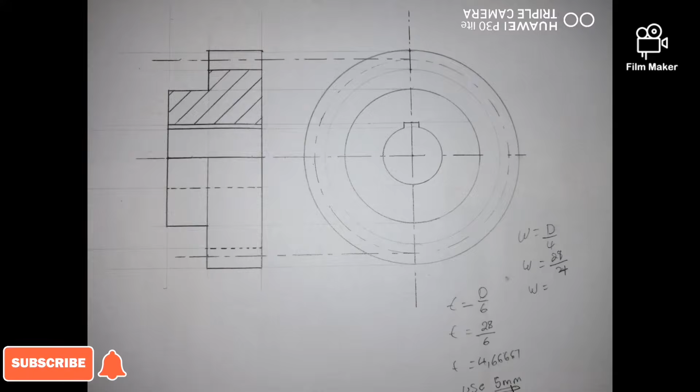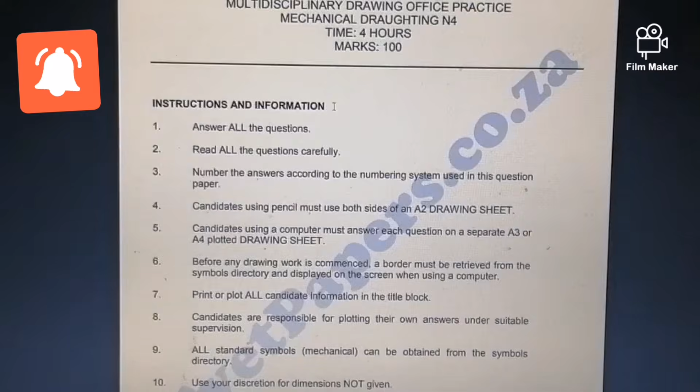Alright, ladies and gents, today I want us to look at this previous question paper that was written on the 27 March 2019 of Mechanical Draughting N4. So I want us to look at question 1. So let us look at how we can get all these 10 marks. Question 1, which was paying 10 marks.

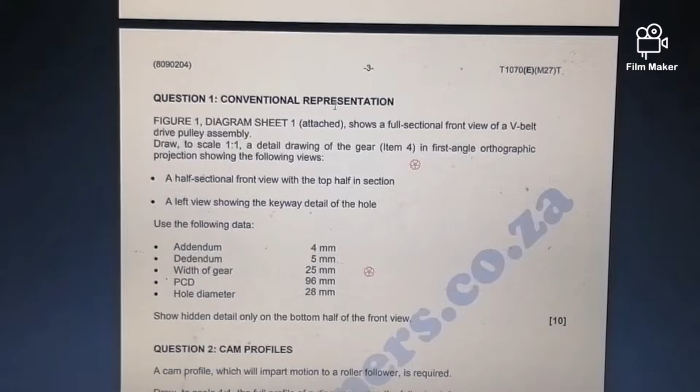So the question read as follows: Figure 1 diagram sheet 1 attached shows a full sectional front view of a V-belt drive pulley assembly. Draw to a scale 1:1 a detailed drawing of this gear, item 4, in first angle orthographic projection. You're supposed to draw a half sectional front view with the top half in section, remember, of that gear, and a left view showing the keyway detail of the hole.

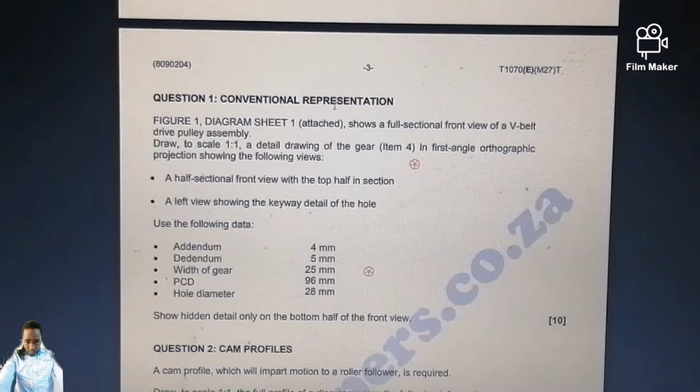So this is the following information of item 4. We are given an addendum of 4mm, dedendum 5mm. The width of the gear is 25mm, and the PCD is 96mm. The diameter of the hole is 28mm. You are expected to show the hidden details only on the bottom half of the front view, 10 marks. So if you can go down, we can start.

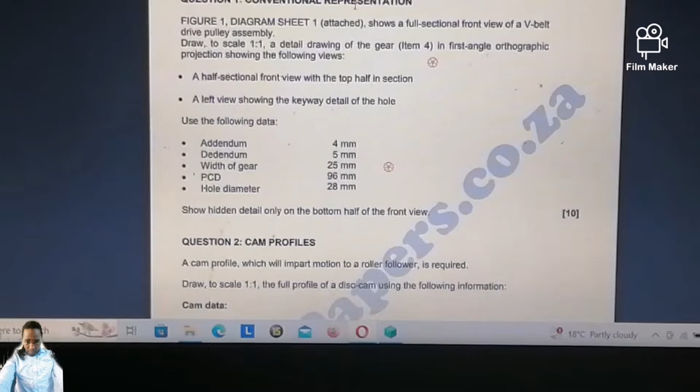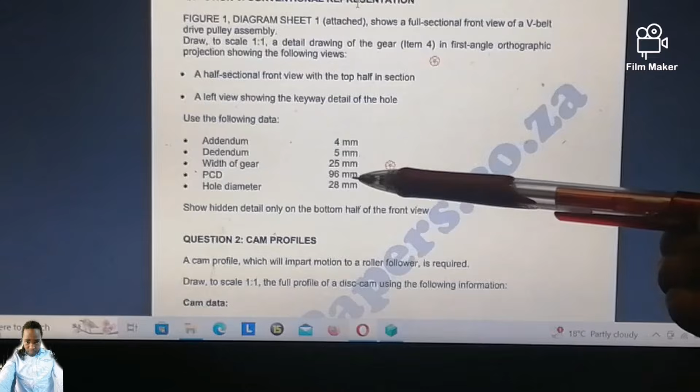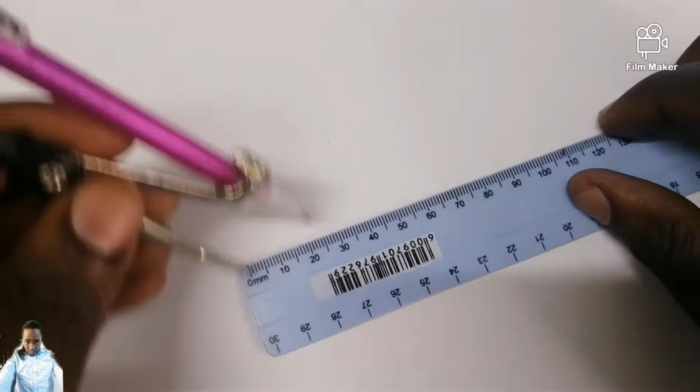So what you can do here, start with the left view, where you are going to draw this PCD. This stands for pitch circle diameter, isn't it? Using a scale 1:1, which means you're going to say 96 divided by 2, which is 48. Then open my drawing compass to 48. There's my 48mm. So now I come here, then I draw the PCD. So that's how you draw a PCD. It's a center line.

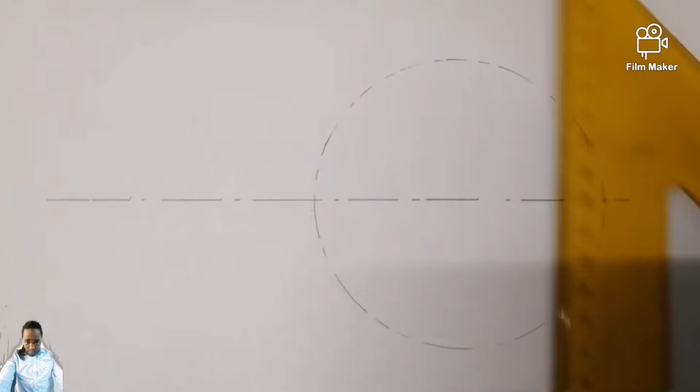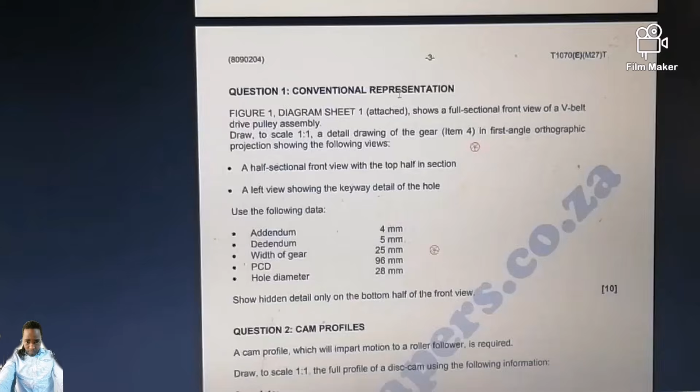So now where we're placing the drawing compass, I'm going to have the horizontal center line as well as the vertical center line. Right, so from there we are told that the addendum is 4mm and the dedendum is 5mm. We know the addendum is the dimension from the PCD going up. So these are the dimensions that we are going to follow.

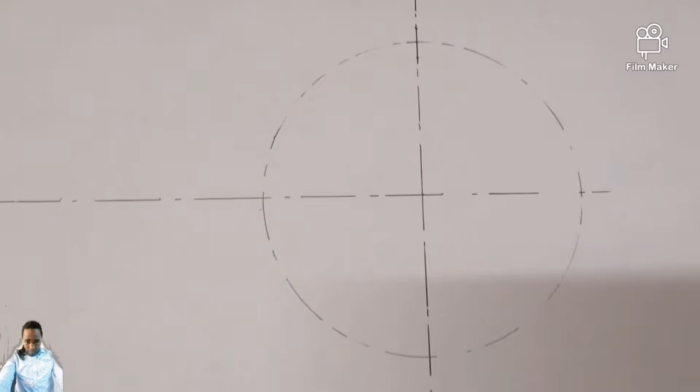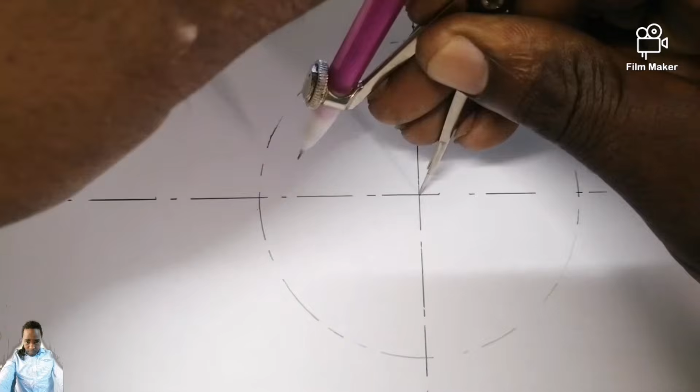So now I'm going to measure 4mm from here going out. So from here till here is the addendum, 4mm. From here till here 5mm, which is the dedendum. Then I can place my drawing compass here, extended to the dedendum. Then I draw a faint line like this. Then I can draw this one dark. This is it.

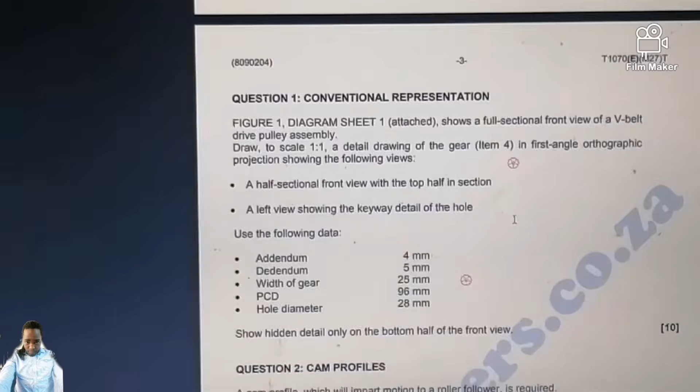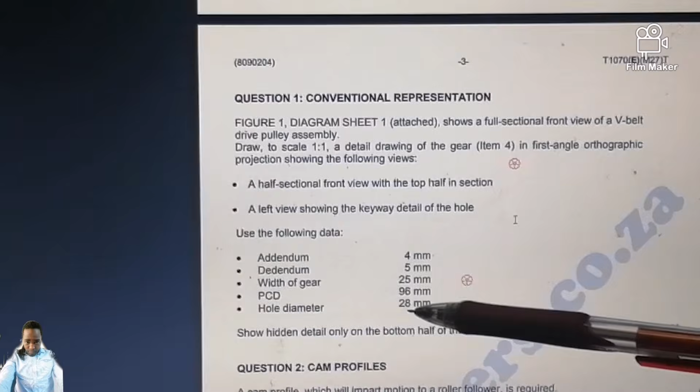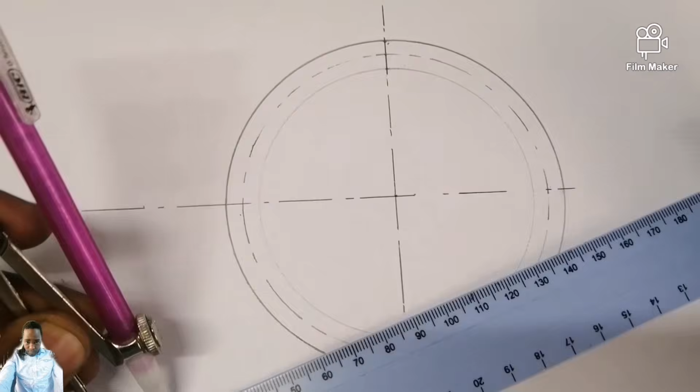So from there we can follow it by the hole diameter, which is 28 millimeter. We are going to say 28 divided by 2, 14. So you open your drawing compass to 14 millimeter. Now I come place it here. I'll draw it faint for now, because there is a keyway here that we have to get.

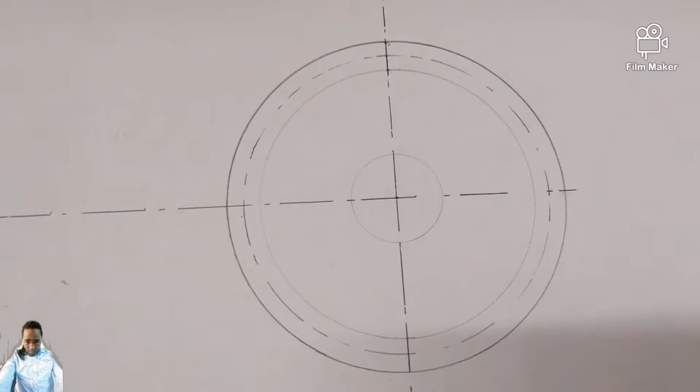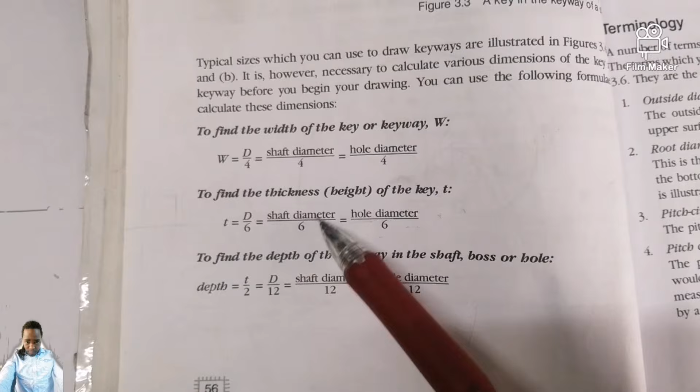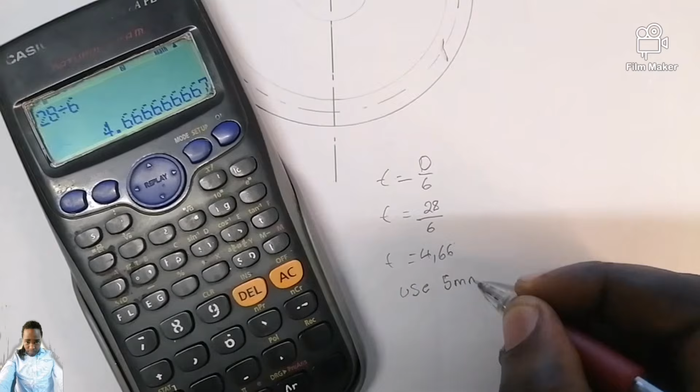So you must remember this formula. To get the keyway, you are going to say the thickness is equal to d over 6. The d is the shaft diameter, or hole diameter, which is what we have. So t equals 28 over 6. Thickness is going to be 4.66 recurring, so you're going to use 5 millimeter. You understand?

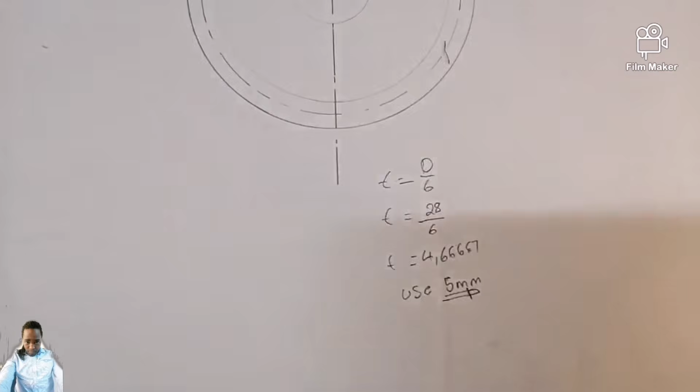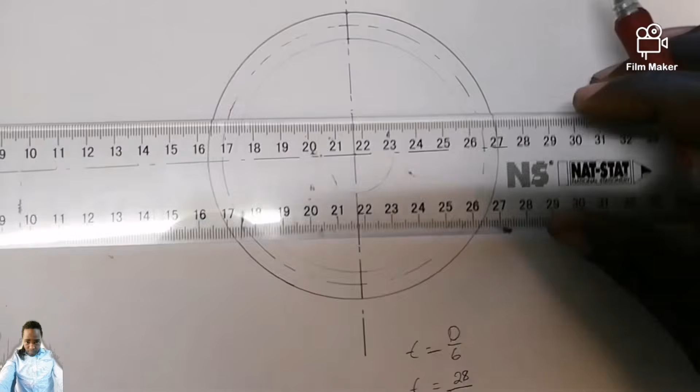So what are you going to do with this 5 millimeter? We are going to divide this 5 millimeter into 2 again, which means from here we are going to say 2.5 and 2.5. So the dimension that we're going to use here is this one. From here it's 2.5. After I've gotten that one, I can now draw a faint line like this.

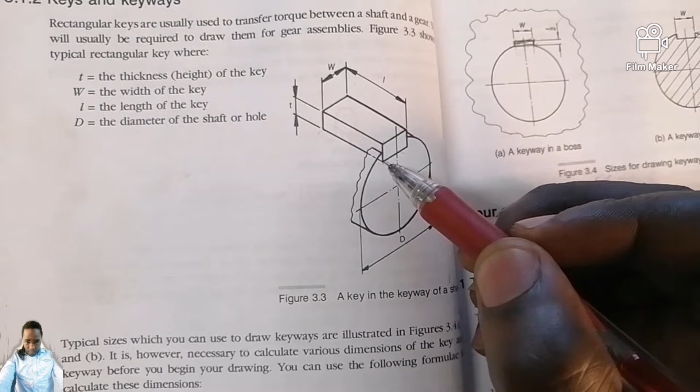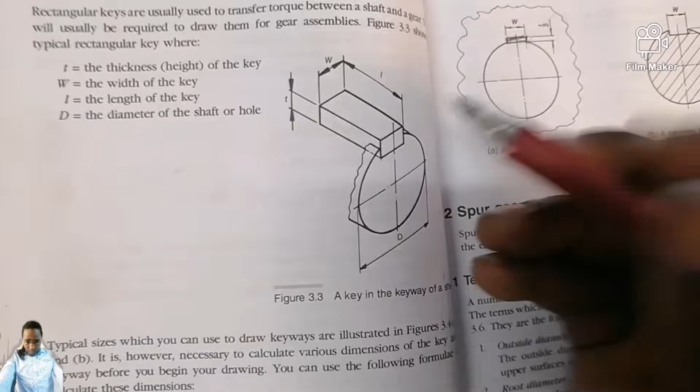So now we are going to calculate the width of the keyway. You see that from here till here is the full T. From here till here going in is half of your T. So now we have to calculate the width of your keyway. The formula is width is equal to diameter over 4. So your width equals 28 over 4.

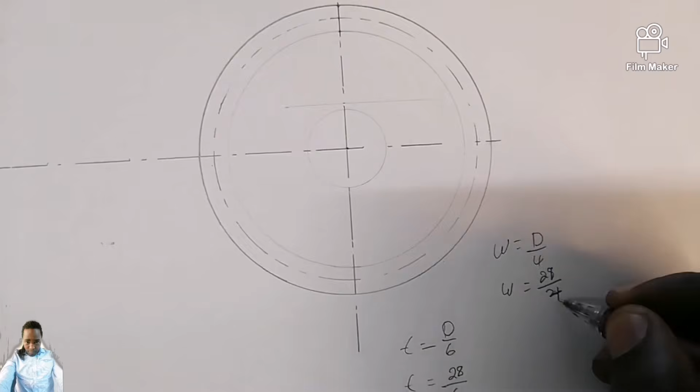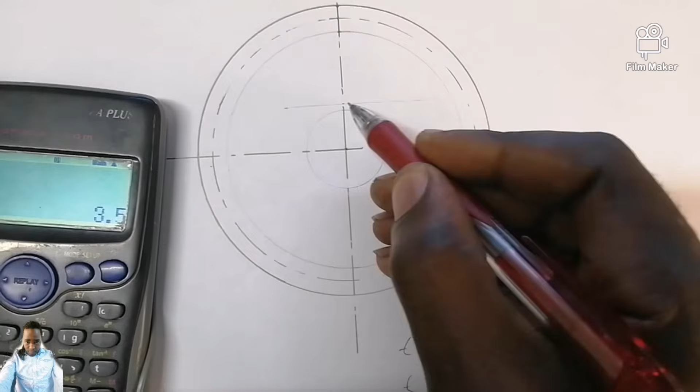How much are you getting? 28 divided by 4, you are getting 7 millimeter. Then again, this 7 millimeter, I'm going to say 7 divided by 2, which is 3.5. So from here till there 3.5, from here till there 3.5. Let's do it.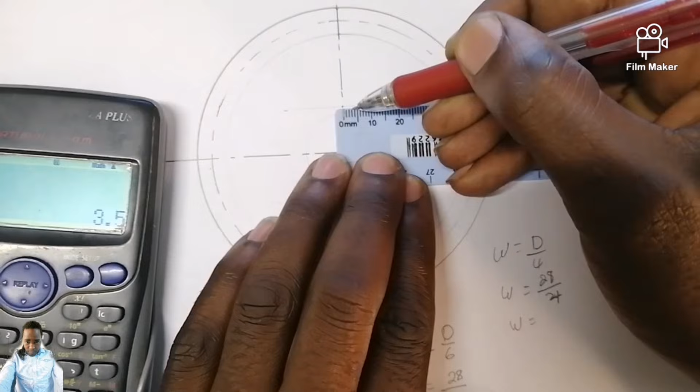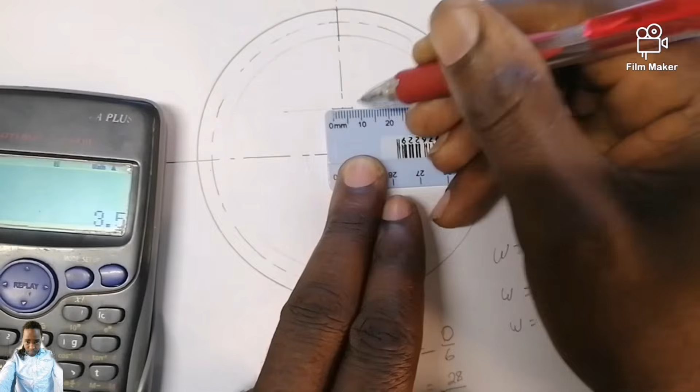This is my 0, 1, 2, 3.5. So the 0.5 is between 3 and 4. So 0, 1, 2, 3.5 is between 3 and 4, which means from here till here I can have it dark already. So now I come and construct it vertically dark down from here till there, and from here till there.

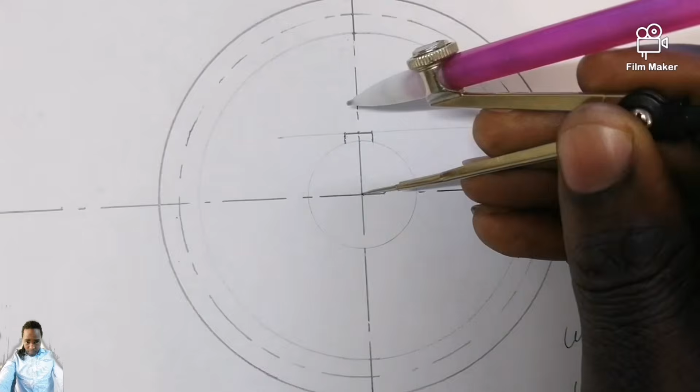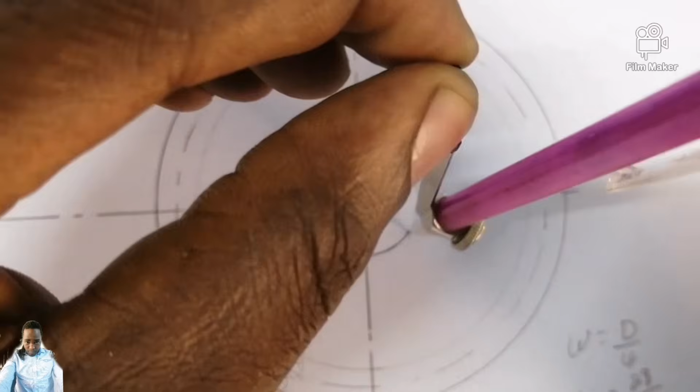There I can now place my drawing compass here and have this one solid. Solid from here. There you go. So from here till here it's going to remain as a faint line.

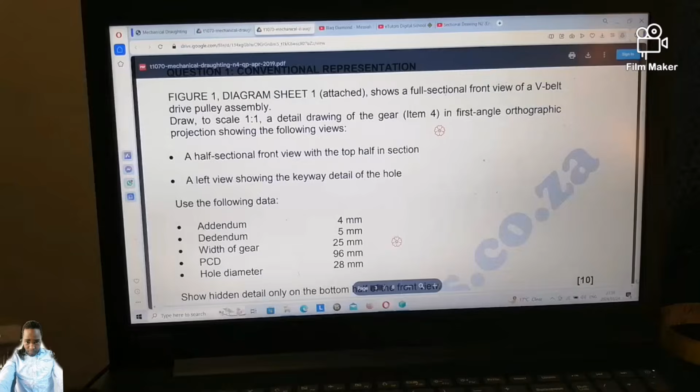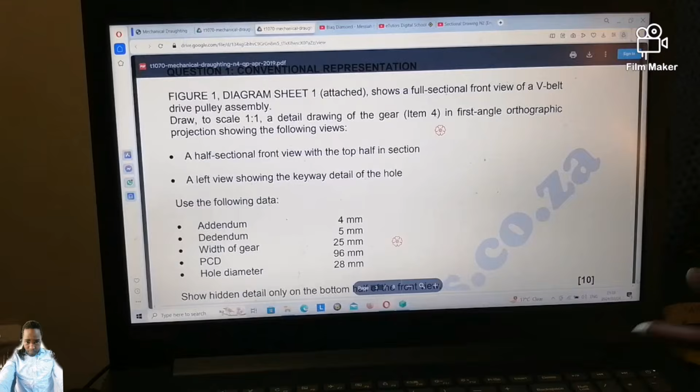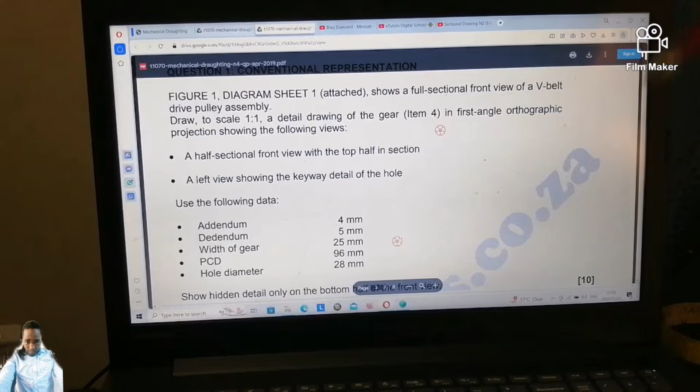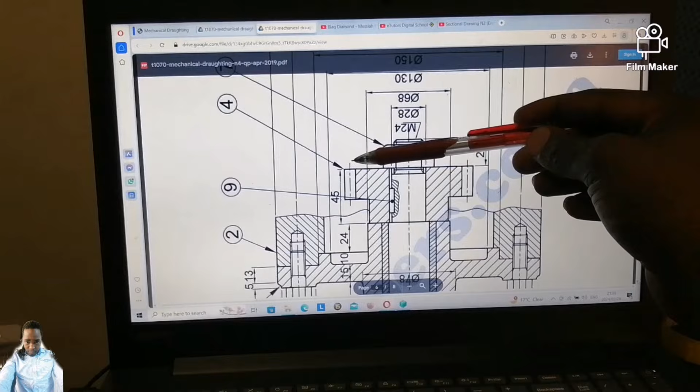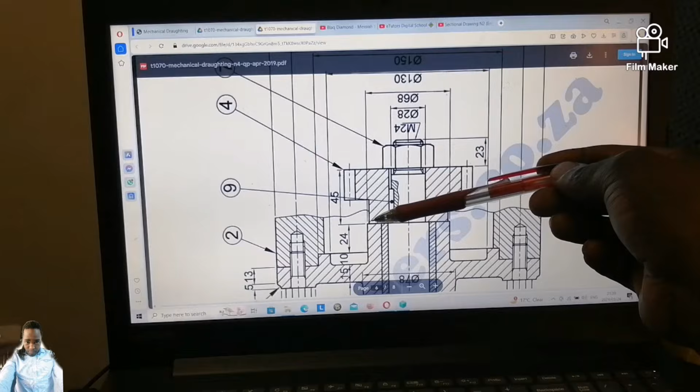That is why we were not given the dimension from here till there, isn't it? The dimension of this is the one that we were given right from question 1, because from here till here is the addendum, which is what we've done. So the dimension that we're looking for now is this one, from here till there, which is 45 millimeter, and from here till there is the thickness of your gear. They said it is 25 millimeter.

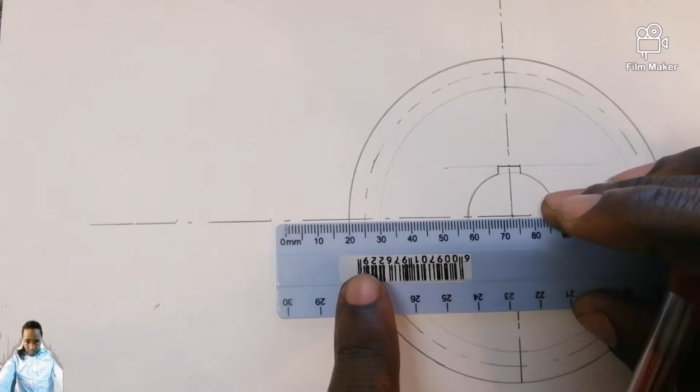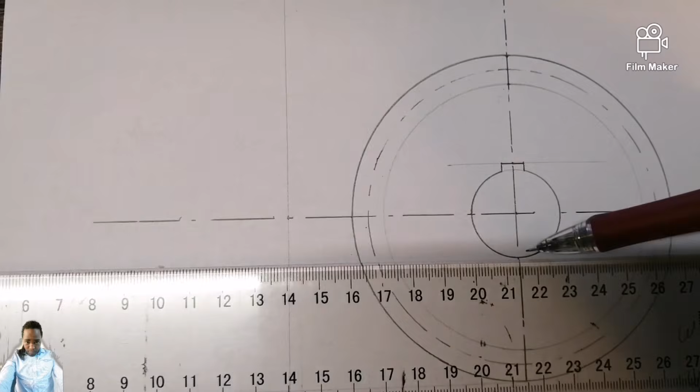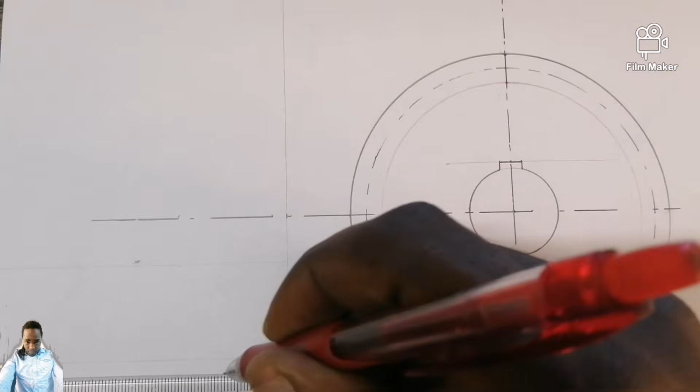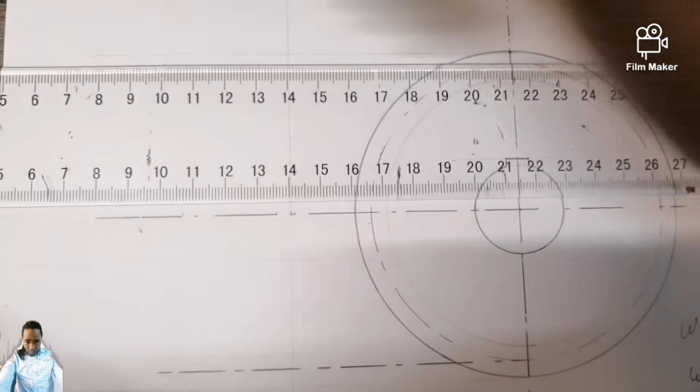Right, so your next step, you are going to measure 20 millimeter from here till there. Then from there I have a faint line vertical like this. Now I can have this faint on this side, faint in this one, and this one still remains as a center. Then this one faint as well. There you go. Then this one faint, this one faint, as well as this one faint.

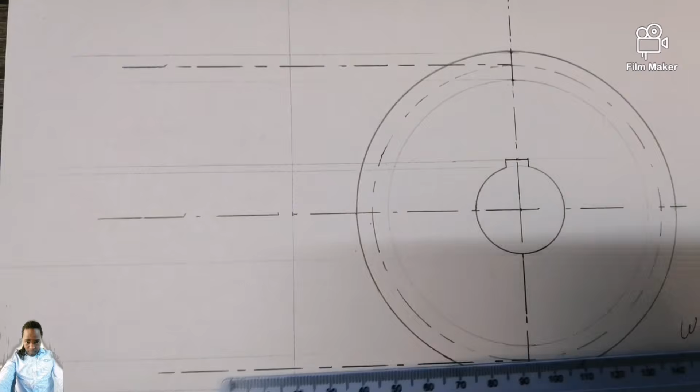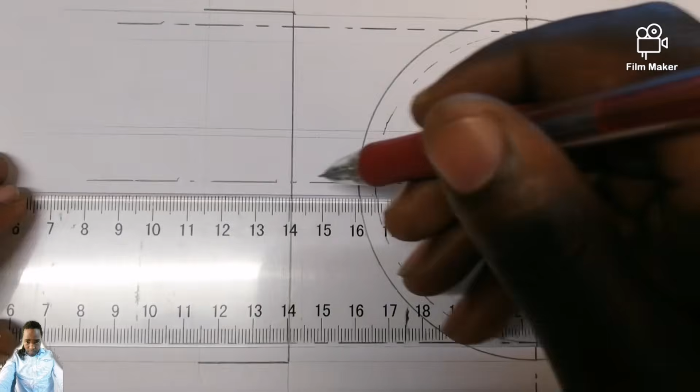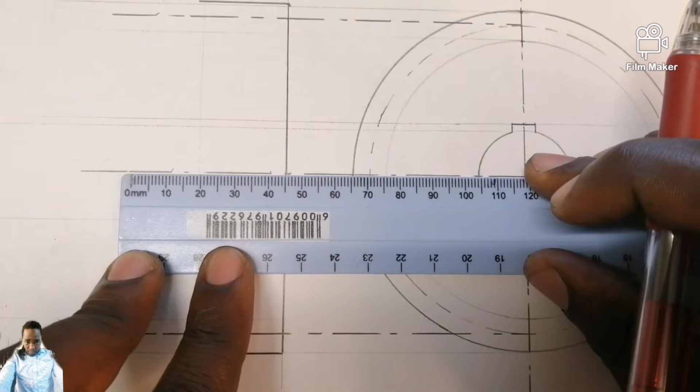So remember that the question was a half sectional front view with the top half in sectioning, you understand? Which means this will remain as an outside view; the bottom part and the upper part are going to remain as a dark line. But remember that from here going to the side is 45 millimeter. I mark it 0 there of item 4. From here till here is 25, from here till here 45, isn't it?

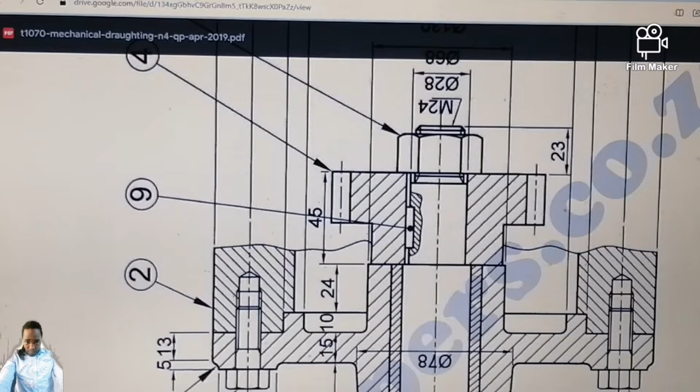So the diameter of this one is 68. So you're going to say 68 divided by 2. You're supposed to be getting 34 millimeter. So you open your drawing compass to 34, which is this one. Now I come and draw this one dark. Then from there, take the circumference point. There you go. So from here till there, it's going to be dark.

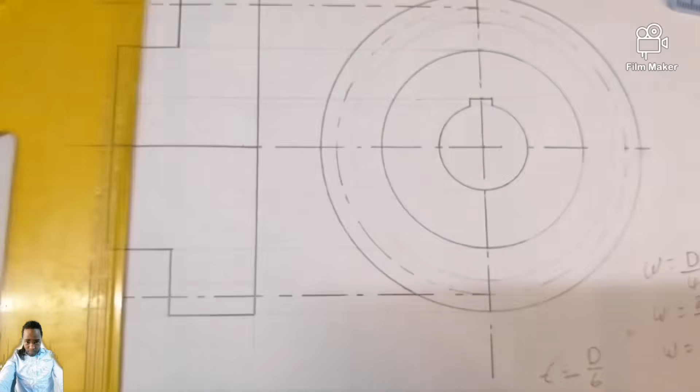Remember that this is item 4. So from here till there, going to be dark. Then this one, dark here, dark there. So this one without fear or favor is supposed to be solid, so that I'll have this line continuing till here, right? And have this one as hidden. Then this one is going to be hidden as well.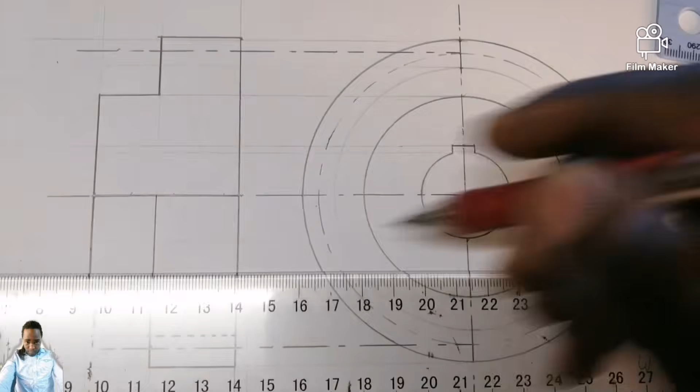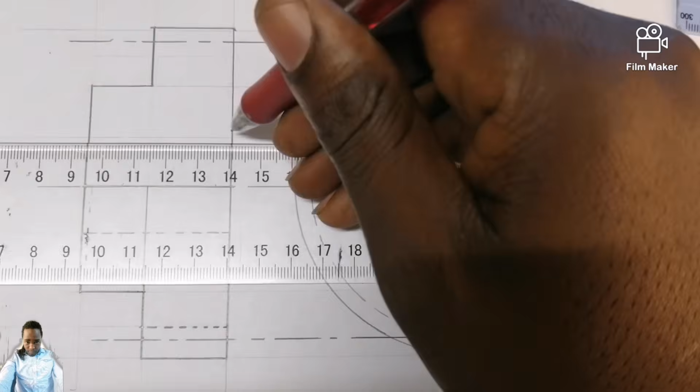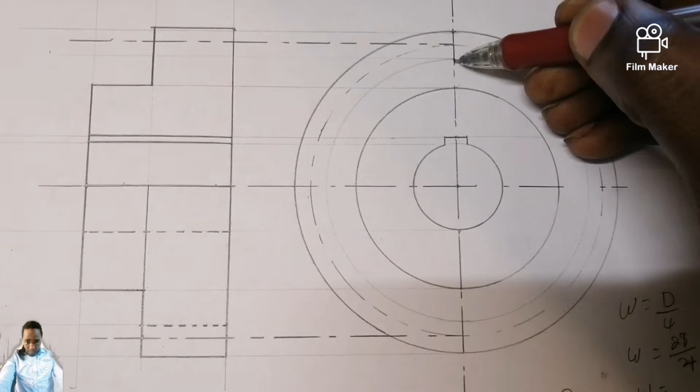So actually the hacksaw started to cut from here till there. From here till here it cut, isn't it? From here till down here it was a hole. So this one is going to be solid here and solid there, because the upper part must remain as an inside view. From here till here it was like the teeth, so this one will also change to be solid.

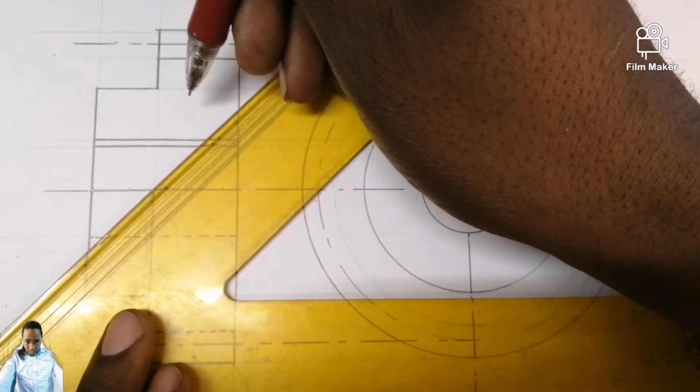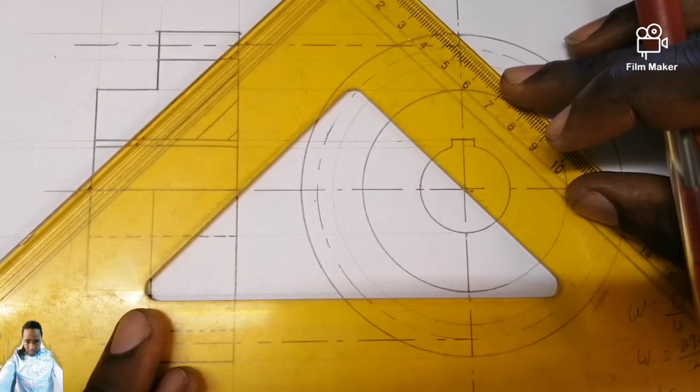So from here I can now section. I'll start here. Your hatches must be at an angle of 45, equally spaced. The direction, whether clockwise or anti-clockwise, is fine, whatever direction you choose. So there we go. There it goes. There you go.

So that was mechanical drafting, guys. Question 1, a conventional representation of a gear. The question was, draw item 4 half sectional with the upper part in sectioning, which means the bottom part is supposed to remain as an outside view.